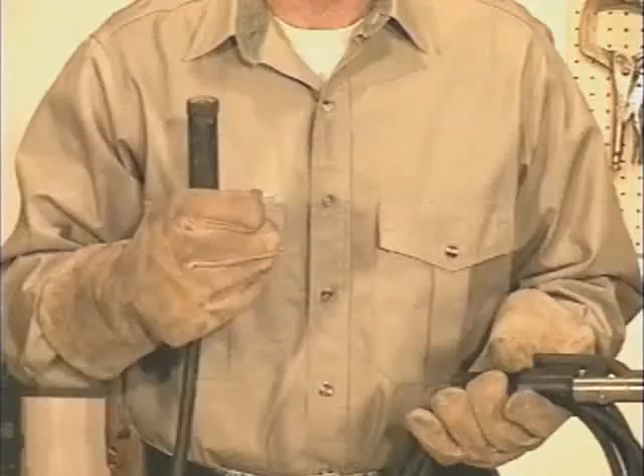Welding leads are insulated copper wire and come in sizes like a number 4, 2, 1, and single aught. The larger the number, the smaller the diameter. The size welding lead you need to use depends on how many amps you'll be using and how long the lead is. And welding supply stores have charts to determine the size lead you need to use. On the end of the main lead, I use a quick connect with about 15 feet of number 4 lead and the electrode holder. This is called a whip. The smaller lead is a little more flexible and easier to deal with.

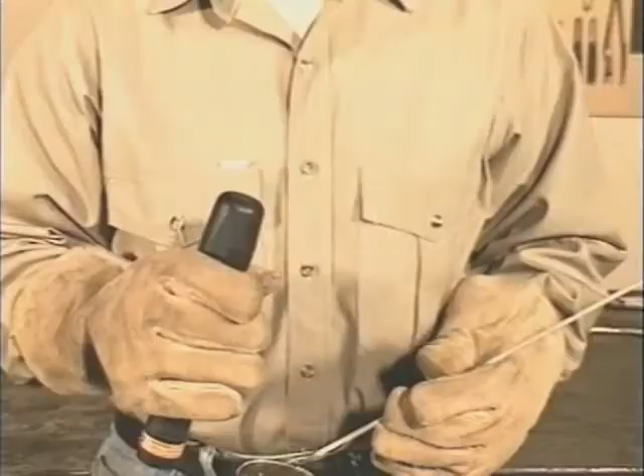This is a 200 amp electrode holder. Larger ones like 250 or 300 amp are available if you're mainly using big rods with high amperage settings. But for general use, the 200 amp is more comfortable. And I usually call this the Stinger. Another type of electrode holder is available where you stick the rod in and twist the handle. If you need the rod at a different angle, you can just bend it. You also need a ground clamp. And I use a quick connect here too, in case I need to add more lead.

Now, the light from arc welding is extremely bright. You need filter lenses both to be able to see the molten weld puddle and to protect your eyes from getting burned. These are typically available from a number 8 to a number 14. The lower the number, the lighter the lens. From what I can tell, some people are more sensitive to this light than others.

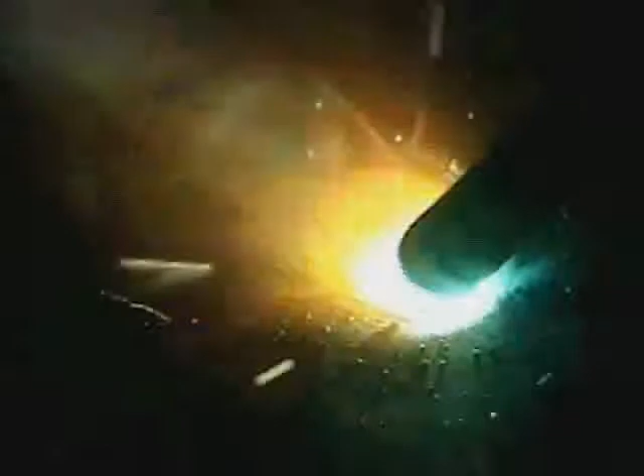A number 8 filter lens is way too light. Industry recommends a number 10, and I use a number 9. The lens has to be dark enough to protect your eyes, but light enough so you can clearly see the weld puddle. If you're welding with big rods using high amperage, you may want a shade darker lens than normal. And if this filter lens gets chipped or cracked, replace it.

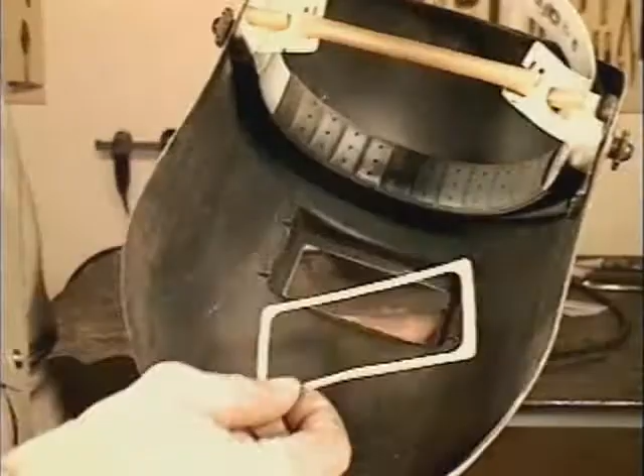To protect the filter lens from sparks or getting scratched, I use clear plastic lenses in front and in back. There's a gasket that goes in first to seal the lenses, and everything's held in place with a clip. After you install the lenses, hold the hood up to a light and check for leaks around the edges. When you start welding, check it again. If any light from the arc is leaking around the edges of the lenses, it'll burn your eyes for sure.

Also, replace the clear lenses when they get dirty or scratched. Having a clean lens makes a big difference in allowing you to clearly see the weld puddle. Okay, the last thing we need are welding rods. So let's take a look at some of the common ones.

Some of the more common welding rods for carbon steel are E6010, 6011, 6013, and 7018. And the numbers are written right on the rods. These numbers actually mean something, so let's take a look at E6010. The E designates an arc welding electrode.

The first two numbers, in this case 60, indicate that the filler metal has a tensile strength of 60,000 pounds per square inch. Depending on certain conditions of the weld, you may get a little more or less, but it'll be close to that. The 70 in 7018 indicates 70,000 pounds per square inch. So the first two numbers indicate tensile strength, and tensile strength is the force it takes to pull it apart.

The third number indicates the position the rod can be used in. A number 1 shows that the weld puddle solidifies quick enough so this rod can be used in any position: flat, vertical, horizontal, or overhead. A number 2, like in 7024, indicates that the molten puddle remains so fluid this rod can only be used in the flat position or for a horizontal fillet, which is more or less flat.

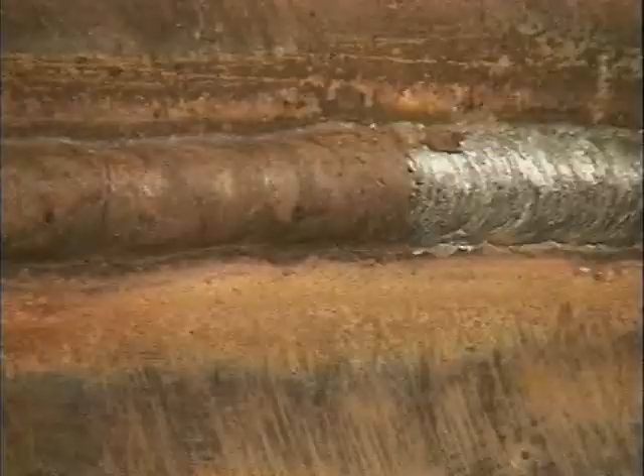The last two numbers together, here it's a 10, indicate the composition of the flux coating. And this flux is what makes the whole arc welding process possible. As it burns, a gas is created that purges the weld puddle, keeping the oxygen in the air from mixing with the molten metal, which could cause gas pockets in the weld bead called porosity. The flux also helps stabilize the arc, and it lifts impurities from the molten metal. When the flux cools, it forms a slag coating over the hot weld bead, providing more protection from the air.

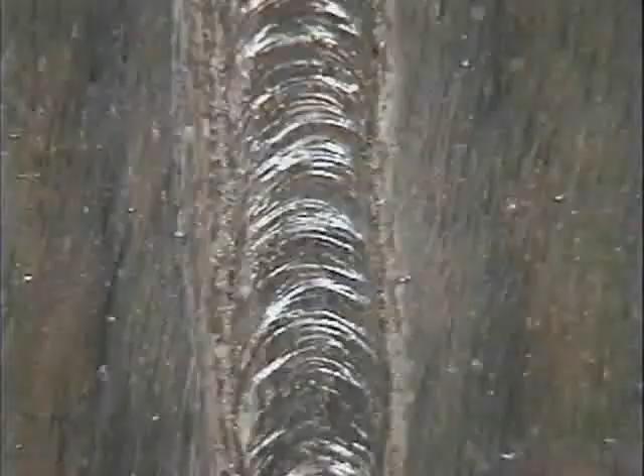There isn't a magic welding rod that just does everything. You may find one that you like to use and that produces good results, but basically welding rods can be put into one of two groups, fast freeze or filler. The fast freeze rods, 6010 and 6011, have a strong arc force that provides deep penetration. A light flux coating makes the molten weld puddle clearly visible, and the weld puddle solidifies relatively quick, leaving distinct ripples in the finished weld bead.

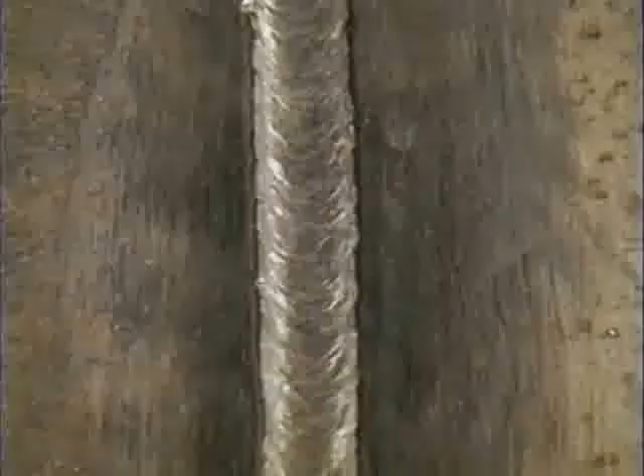Filler rods, 6013, 7018, and 7024, don't penetrate as deep. They build up weld bead. A heavier flux coating covers the weld puddle, keeping it more fluid, allowing for a smoother finished weld bead. So where exactly do you use these different welding rods?

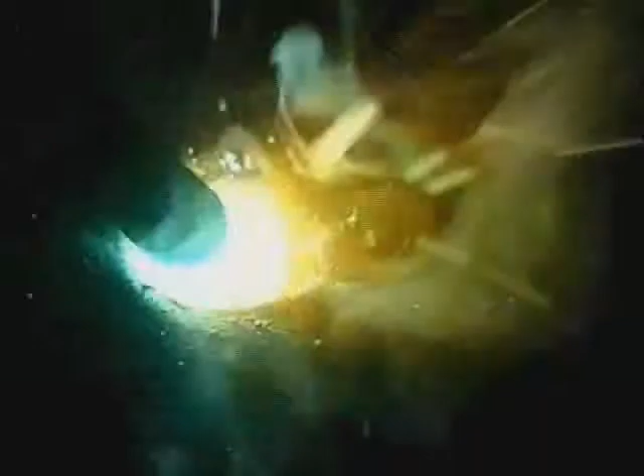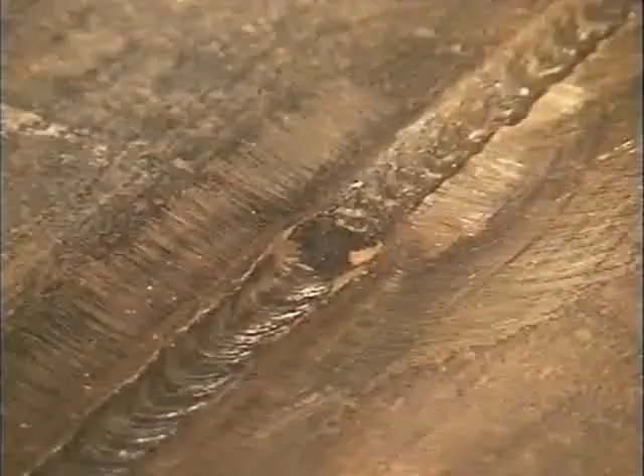6010 is used strictly on DC plus and 6011 on AC or DC plus. The strong arc force of these rods can blow off rust and paint, making these a good choice for repairs or modifications where the metal can't be completely cleaned. Also, these rods are often used as a first pass to provide deep penetration or to fill gaps and fit-ups that are less than perfect, then covered with a filler rod.

6013 was actually designed for high-speed sheet metal welding on DC minus, but these rods can also be used on AC or DC plus for general purpose welding and light fabrication. With stabilizers in the flux, 6013 is probably the easiest of all the rods to use, and it produces a smooth finished weld bead.

7018 is a low hydrogen rod with iron powder in the flux. It's generally used on DC plus, and an AC 7018 is also available. These produce the highest quality welds and were developed for situations where there's extreme stress on the weld joint.

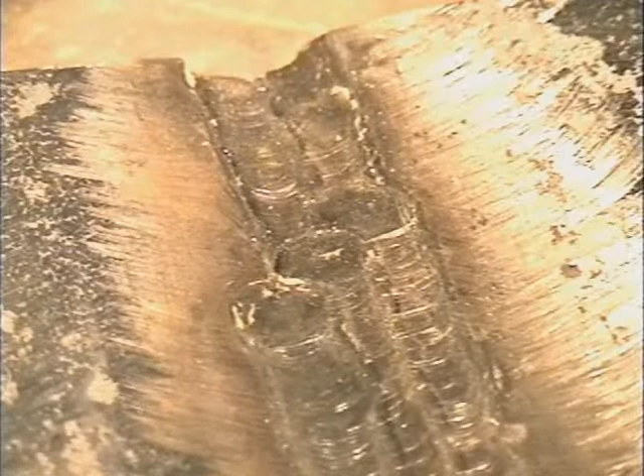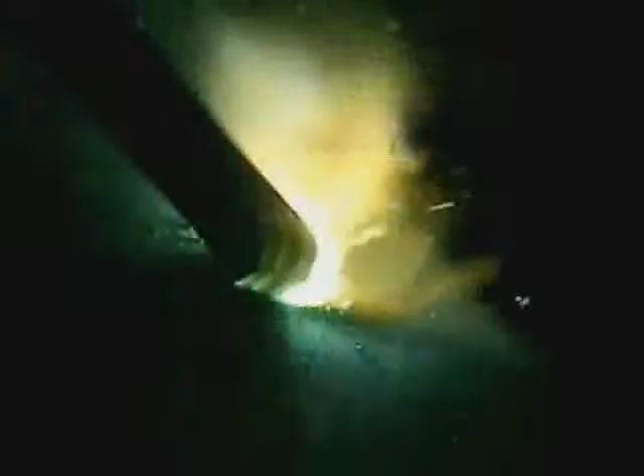It can be used to weld some of the harder low alloy steels or cast steels, and when making heavier welds, the low hydrogen characteristics prevent the weld from cracking because of the expansion and contraction of the metal. Iron powder in the flux provides a high filler metal deposit rate, which means you can put more metal down faster. 7018 produces a smooth finished weld bead, but does require clean metal and a well-prepared joint.

7024 was used extensively in fabrication before wire feed. A heavy flux coating produces an extremely smooth weld bead, but these rods do require clean metal and a slightly higher amperage setting. 7024 can be used on DC plus or AC, and the 2 does indicate that this rod can only be used in the flat position.

6010, 6011, 6013, and 7018 are common rods and should be available everywhere. There are other welding rods, and they'll either be a fast freeze or a filler, with a different tensile strength, a slightly different flux covering, and usually designed for a specific purpose.

Now, each of these rods has distinct characteristics, but there are some basic fundamentals that are common to all of arc welding. We'll start with the fast freeze type rods because the light flux allows you to see the molten weld puddle clearly.

The fast freeze rods 6010 and 6011 are similar, and the same techniques can be used with either one. 6010 on DC plus might freeze or solidify a little quicker. 6011 with either AC or DC plus may be a little easier to use because of the stabilizers in the flux that help maintain the arc. Let's start by watching a weld, and I'll try and describe what to look for.

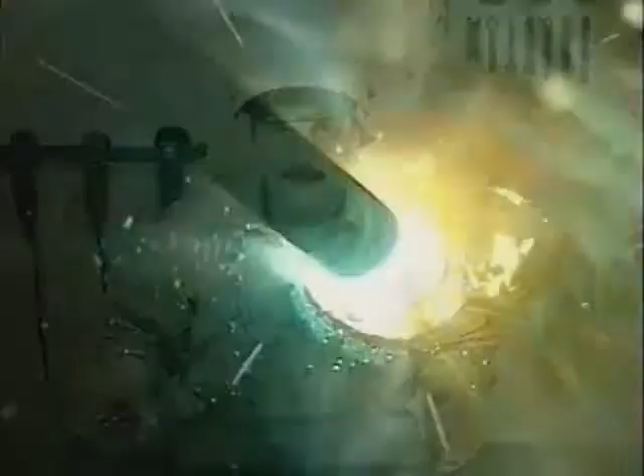After scratching the rod against the metal to make contact, the tip is held about 1/8 of an inch or 3 millimeters off the surface. This creates a gap for the arc to cross, and that's where the bright light comes from. While you're welding, don't watch the light. Look past it, through the smoke and sparks, and focus on the molten puddle of metal behind the rod. Welding takes a little practice, but it's not very difficult.

Let's go through this step by step. First of all, you need to pay attention. This is ready to go. Anytime the tip of the rod touches the metal, it will arc. Okay, you want to get comfortable. Welding rods burn for about a minute, and it's a long ways out to the tip of the rod. So get comfortable and relax.

Rest your arm on the table and use both hands on the stinger so you can be as steady as possible. When you're all set, either reach up and flip your hood down, or you can adjust the knobs on the side to flip the hood down with a nod. Starting the arc is like lighting a match. Drag the rod right against the metal. When it lights, bring the tip up and move back to the start.

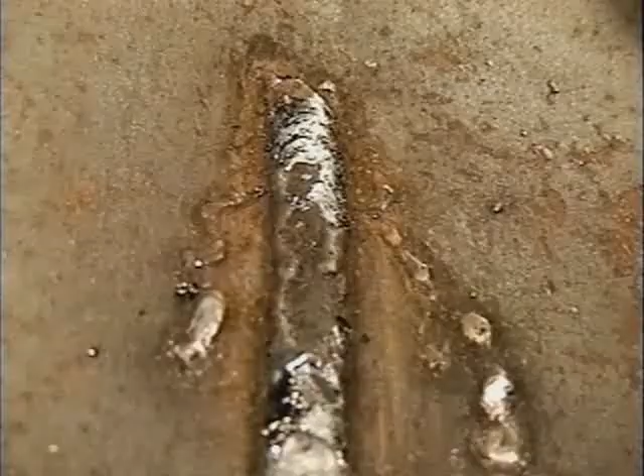A scratch start gets the flux burning, forming the gases that purge air away from the molten puddle. To avoid leaving arc burns all over the metal, try to scratch right where you intend to weld. I usually hold the stinger with my thumb on the release lever. If the rod ever sticks, just open the stinger, then go back and break the rod off.

If you're relighting a rod, the flux may be broken off a little at the tip. A scratch start will burn off that tip before you start depositing metal. Once the rod is burning, you need to start the puddle, giving the molten filler metal a little extra time to fuse to the base metal. This doesn't take long, only 2 or 3 little circles.

Also, as the weld progresses, the base metal will heat up, causing the molten puddle to spread out. Start the puddle wide enough to keep the weld bead a uniform width. During the weld, the tip of the rod is held up off the metal. This is called the arc gap. Having control of this arc gap is one of the first and may be the most important thing you need to learn.

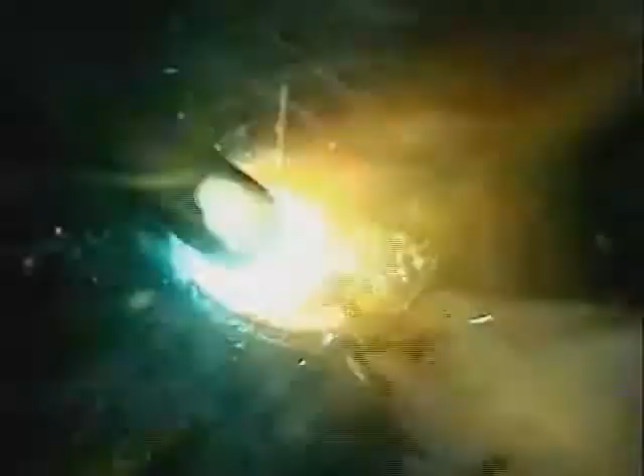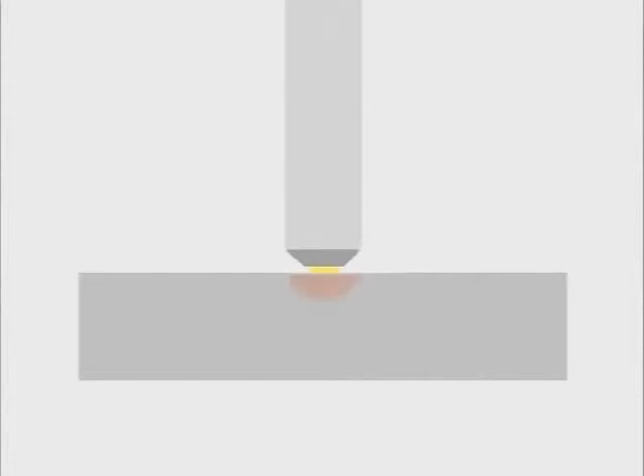As you're moving along to build weld bead, the rod is being consumed, so you also have to be moving in. And the whole time you need to maintain a constant, uniform gap between the tip of the rod and the base metal. If the tip of the rod is jammed right down on the metal, the arc doesn't have time to heat up the base metal.

The weld bead kind of squirts out the back, not tying in well on the sides. If the arc gap is too long, the arc itself can jump around. Penetration will vary and you lose control of how the filler metal is deposited.

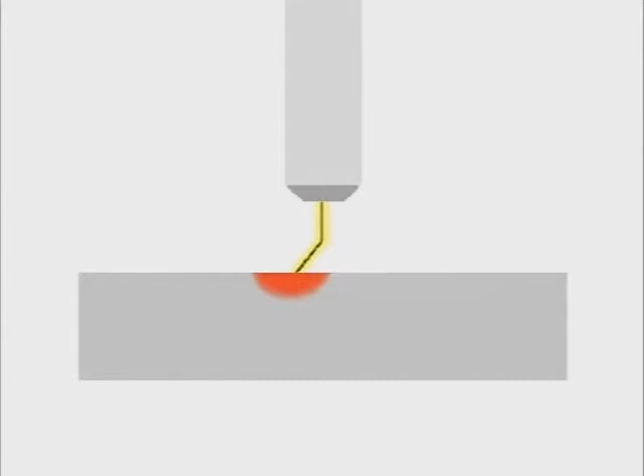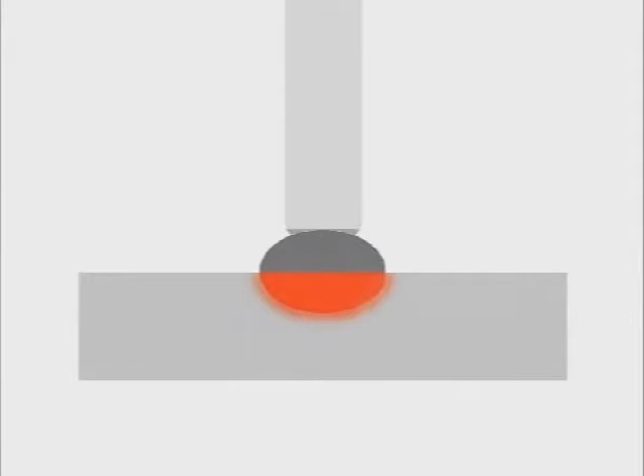Maintaining a constant arc gap is the first step to controlling the molten puddle and producing a uniform weld bead with consistent penetration. The better you learn to control that arc gap, the better you'll be able to weld. When the arc crosses the gap, it melts the base metal, forming a molten puddle. That arc stream also carries the filler metal from the rod into the puddle.

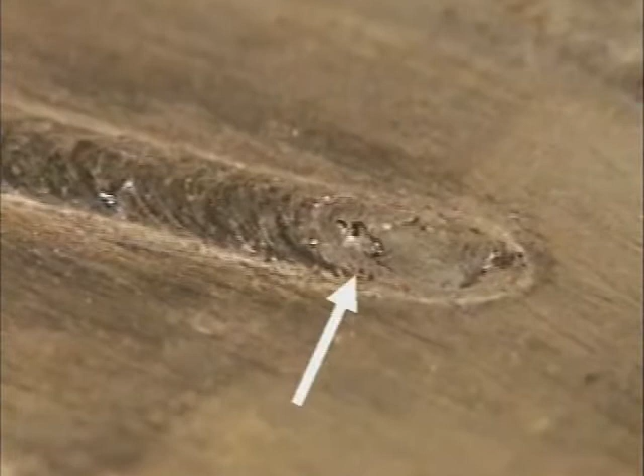This is a 6010 weld bead that I pulled out of quickly. The leading edge of the puddle was actually below the surface of the metal. The strong arc force of 6010 and 6011 penetrates deep into the base metal and pushes the molten puddle back, building up weld bead. While you're welding, watch the sides, right where the weld buildup meets the surface of the base metal. For building up weld bead, either a circular or zigzag motion is commonly used.

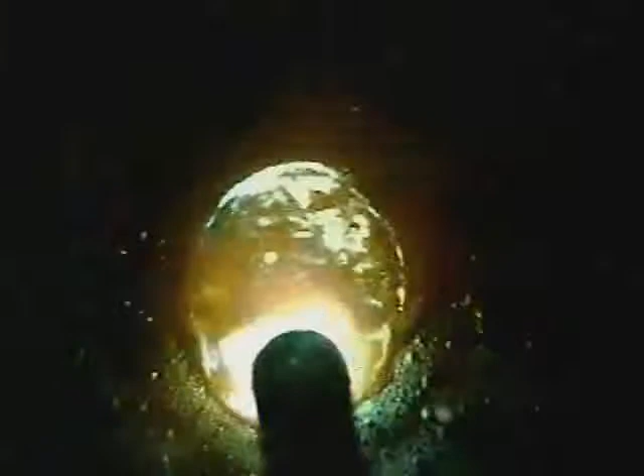With a circular motion, as you ease the puddle over, watch the edge. When you bring it across, watch the weld build up, then the other side, and just ease the puddle around and around. A side-to-side or zigzag will produce nearly the same weld bead. Watch the outside edge, the weld build up, and the outside edge every time you cross.

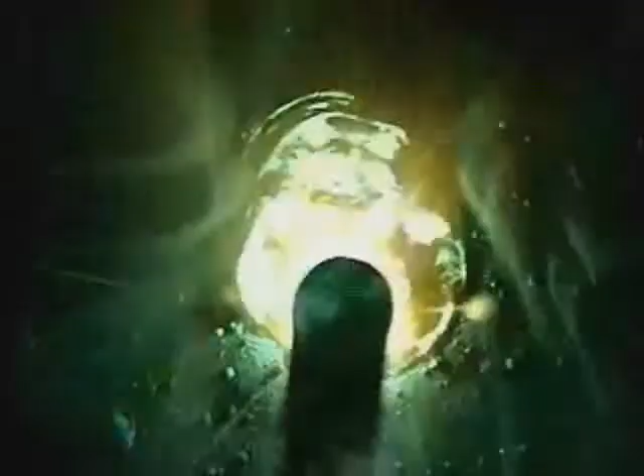Something you want to keep in mind is that molten metal will follow the heat. Whenever you move the puddle across, while you are adding filler metal from the rod, molten metal is also flowing from the side. If enough metal isn't put back there when you come around again, you'll leave undercut. Undercut is a void or groove along the edge of the weld bead that's below the surface of the base metal. You can avoid this by always watching the outside edges to make sure the puddle is filling in and tying in at the surface.

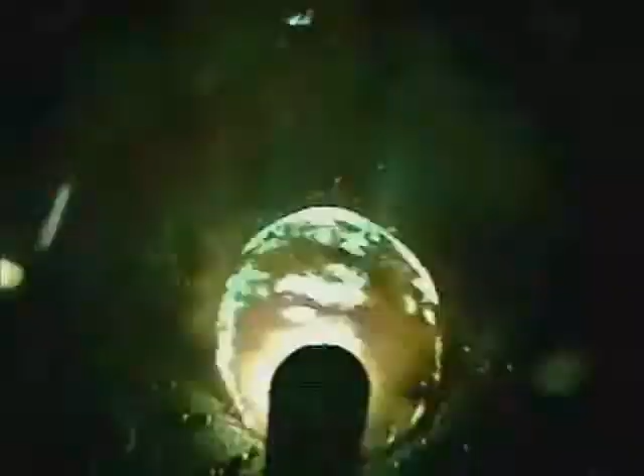There's an arc force at the end of this rod that we can use to help manipulate the weld puddle by angling the rod. Think of it more like pushing the puddle instead of dragging it. Generally speaking, the straighter up and down you hold the rod, the less weld buildup. As you angle the rod, the more the weld bead will stack up.

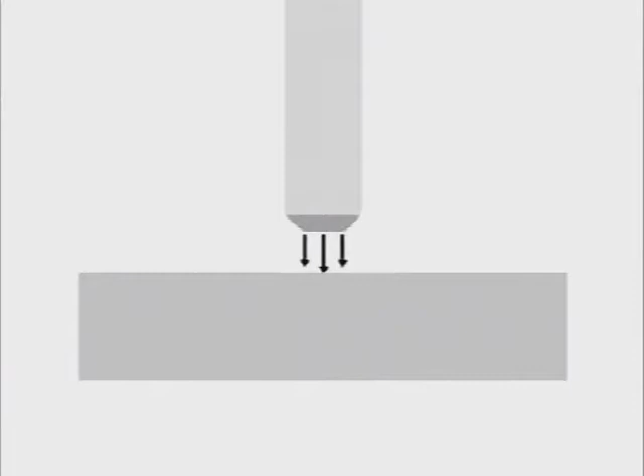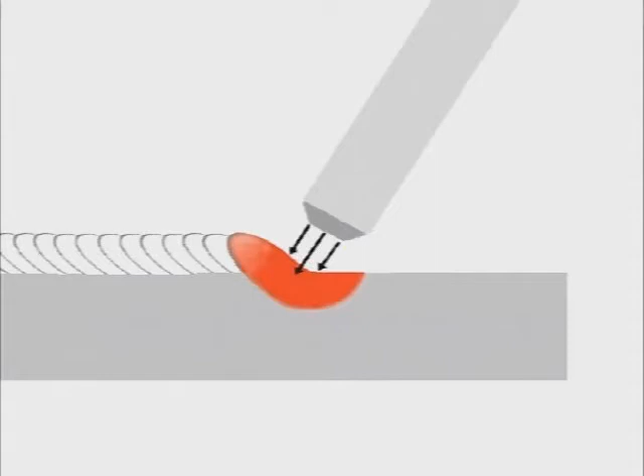When the rod is held straight up and down, all the heat is concentrated right under the rod, and the arc force drives the puddle down. This results in deep penetration and spreads the puddle out for a flatter weld bead. As the rod is angled, the arc force is directed more to the back of the puddle, allowing the weld to build up. If the rod is angled too low, the arc is directed right where you're trying to build weld, making the puddle hard to control.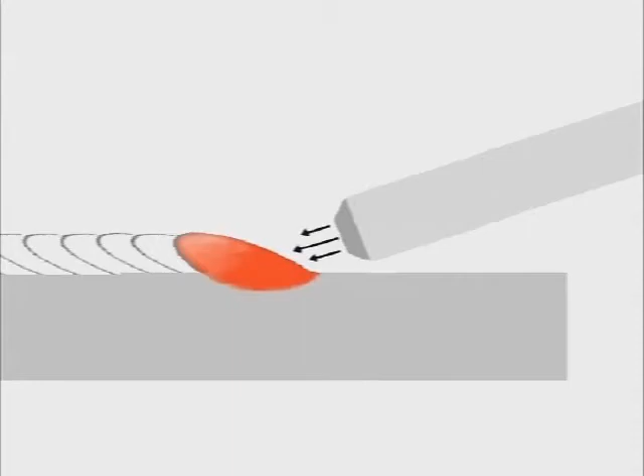You will run into situations where you may want to flatten out the weld, or you'll need to push the puddle back more, so you'll use different rod angles. When you're starting out, an angle somewhere between 45 degrees and straight up and down is comfortable, allows a good view of the puddle, and works well for building weld bead.

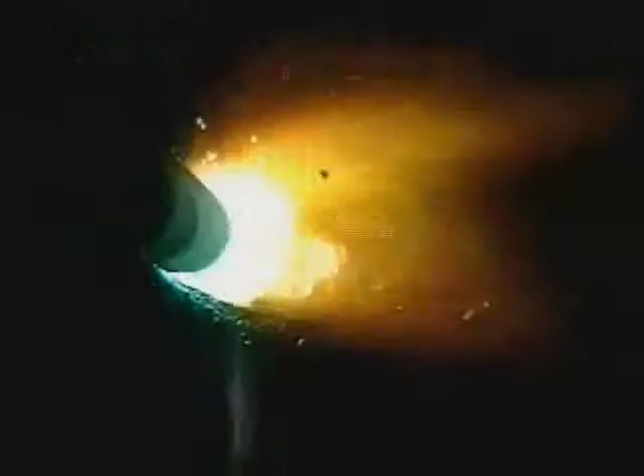The rod size is the diameter measurement of the metal in the electrode. Common sizes are 3/32, 1/8, and 5/32. Most welding rod size charts, where they give the metal thickness to the rod size and amperage setting, are generally from the point of view of maximum weld in minimum amount of time, often not taking into account the welder's ability or different welding situations. You can always use a smaller diameter rod for better control. It just takes a little longer to build up weld bead.

This is a 1/8 E6010 electrode, and this is the most common size used. The manufacturer's recommended amperage setting is from 75 to 130 amps. They're saying this rod will work over a 55 amp range. The specific amperage setting is considered a variable and depends on metal thickness, position of the weld, and the welder's ability. The whole purpose in arc welding is to get the base metals hot enough to melt, forming a molten puddle.

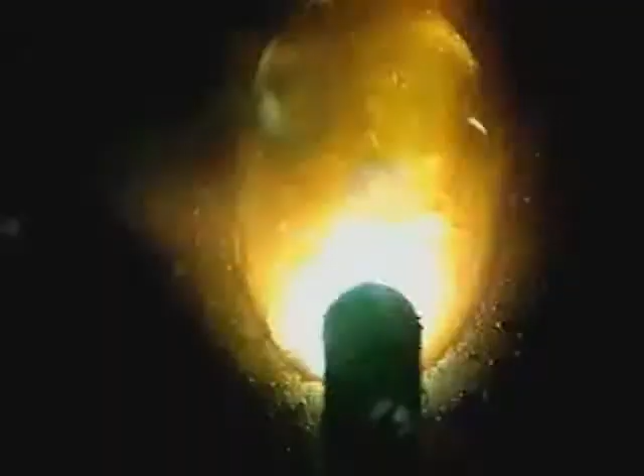If the amperage is set too low, the base metal doesn't get hot enough, and the puddle looks like it's following the rod around. If the amperage is set too high, the base metal gets too hot. The stronger arc force gouges deep into the base metal and pushes the puddle back. When the amperage is set about right, the puddle will spread out and the outside edges tie in immediately. You can ease the puddle around, kind of pushing it with the movement of the rod.

Depending on each welding situation, the amperage setting can change. Thicker metal dissipates the heat, so you need a little more amperage. Thinner metal will get hot fast, so you can use a little lower amperage. The final amperage setting is determined by what the molten puddle is doing. You do need a place to start, so try about the middle of the manufacturer's recommended range, and don't be afraid to go up or down a little bit.

Welding really is about the temperature of the base metal, so we can't talk about the amperage setting without looking at the speed of progression, or travel speed. The faster you move, the less time heat is put to the base metal, so it stays cooler. When you move slower, you're putting the heat to it for a longer amount of time, so the base metal gets hotter. When you move too fast, the metal doesn't have time to heat up, so the weld bead just skates across, not getting any penetration.

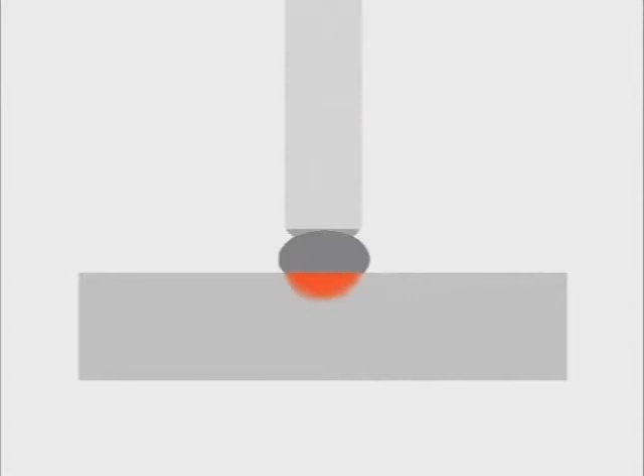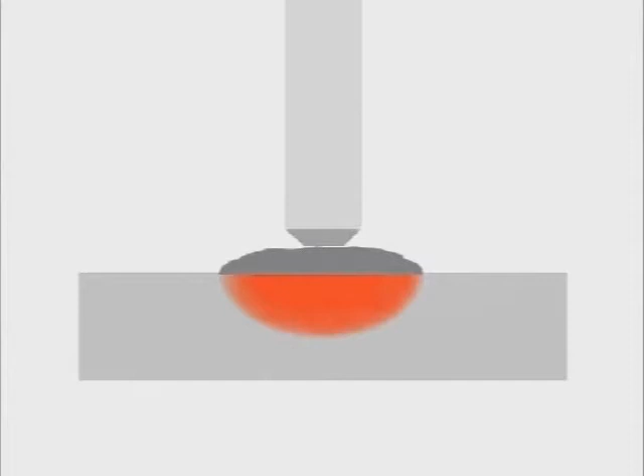If you move too slow, the metal gets extremely hot, causing the puddle to spread out, making it hard to control. When the travel speed and amperage setting match, the puddle spreads out, but it's still controllable. The sides tie in and the weld builds uniformly. As you gain more control of the rod, try using a slightly higher amperage setting and increasing the speed of travel. The higher amperage setting provides better penetration and a smoother finished weld bead. Try to weld as hot as you can control the molten puddle.

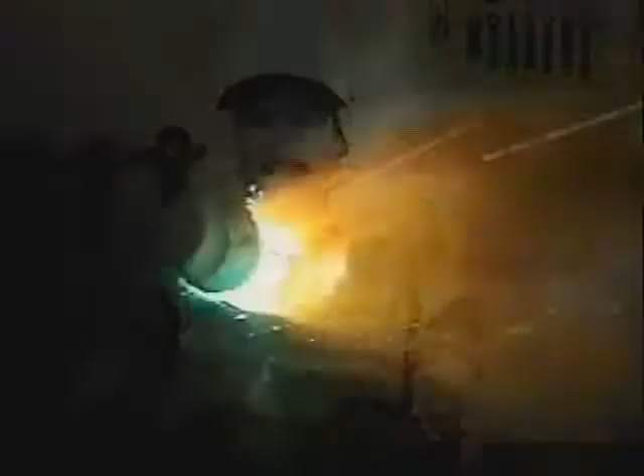To finish a weld bead, add a little extra metal before you pull out, to avoid leaving a crater that's below flush with the surface of the base metal. Circle the rod once or twice, then bring the rod up and back over the weld.

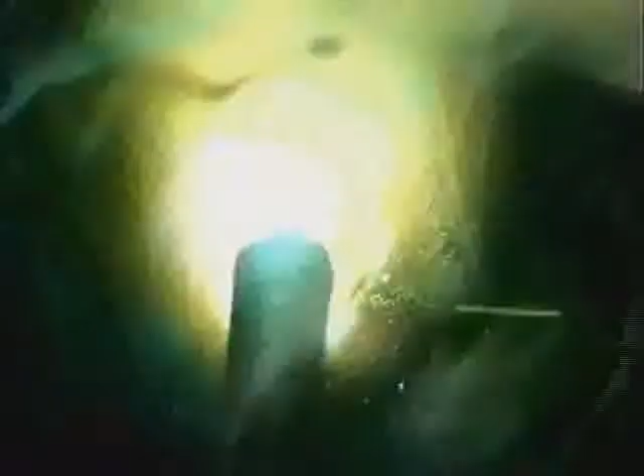While different rods may not look quite the same, these are the basic steps for all the welding rods. Scratch to get the arc going. Start the puddle wide enough to keep the weld a uniform width. Maintain a uniform arc gap with an amperage setting high enough to let the puddle spread out. Ease the puddle around using the force of the arc and watch the sides and the weld build up. Add some filler metal before pulling out over the weld bead. That's about all there is to it.

For 6010 in the flat position, try a circular motion and angle the rod to build up weld. Watch the molten puddle, not the light. Keep the circles tight for a smoother weld bead. A zigzag motion will produce about the same weld. Watch the edges to make sure they're filling in and ease the puddle back and forth.

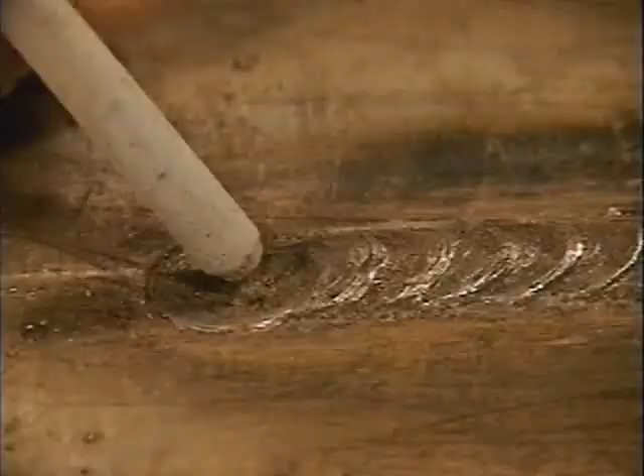Because of the strong arc force and light slag, you can also use a whip or step motion, and this is what makes the fast freeze rod so versatile. The tip of the rod is moved back so the arc is actually brought out of the puddle. Then molten metal is pushed back in. With the step motion, watch both sides and the weld build up every time you push the puddle in. This kind of rod movement can be used for deep penetration by digging down on the backstroke, then filling the gouge in.

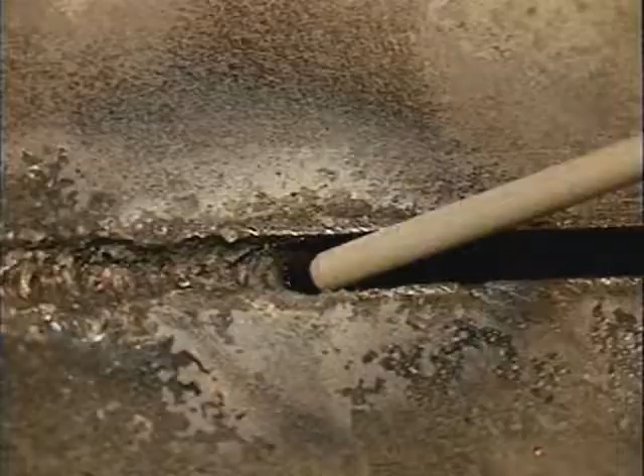On thinner metals, where you don't need a lot of penetration, you can puddle, then long arc to let the weld bead cool, and puddle again. The thinner the metal, the faster this goes. The step motion can also be used to fill gaps in poorly fit joints. Keep the rod deep in the gap and bring it back, allowing the metal to cool. Then push a little more metal in to fill the gap and let it cool again. The step motion may not always look real slick, but it's usually covered with another pass.

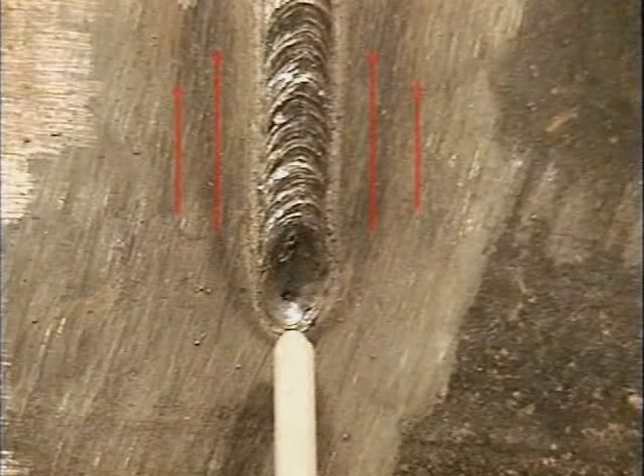So far, we've been welding in the flat position. For a vertical with 6010, you can run either uphill or downhill. Downhill is easier, but there's less penetration and weld buildup. Because heat rises, you're welding away from the heated metal, so you can use a slightly higher amperage setting. Watch the sides and the weld buildup. Try a circular, zigzag, or step motion and angle the rod up a little so the force of the arc helps hold the puddle up.

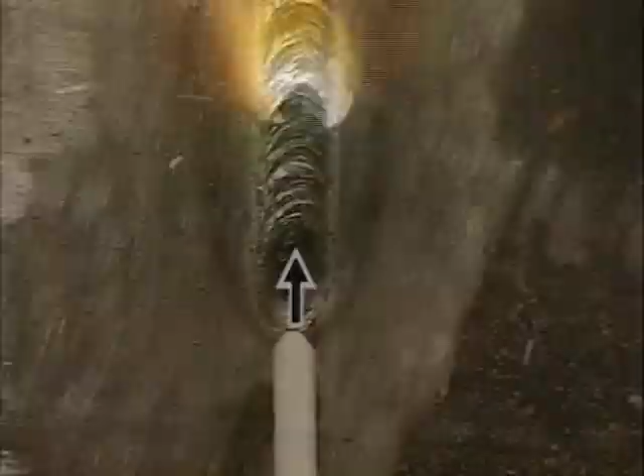With a circular motion, keep a steady arc gap and ease the puddle around. Move fast enough to stay ahead of the molten puddle. If the puddle wants to drip down, try moving faster, or maybe even a slightly lower amperage setting.

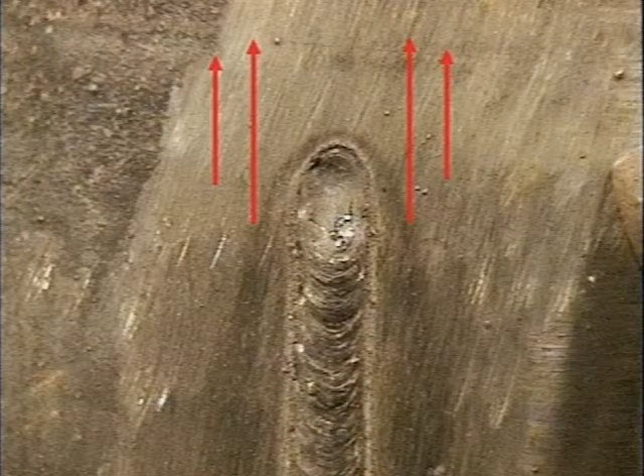When you weld uphill, you'll be welding into the heated metal, so turn the amperage down a little. Angle the rod up so the force of the arc doesn't blow the puddle out. An uphill weld really gouges into the base metal, making undercutting a potential problem. So pay particular attention to the sides of the puddle and watch the weld buildup underneath the rod.

If the base metal gets too hot, the puddle may fall out, or you might burn a hole right through the metal. Mess with the amperage setting and your travel speed until you can carry that puddle right uphill.

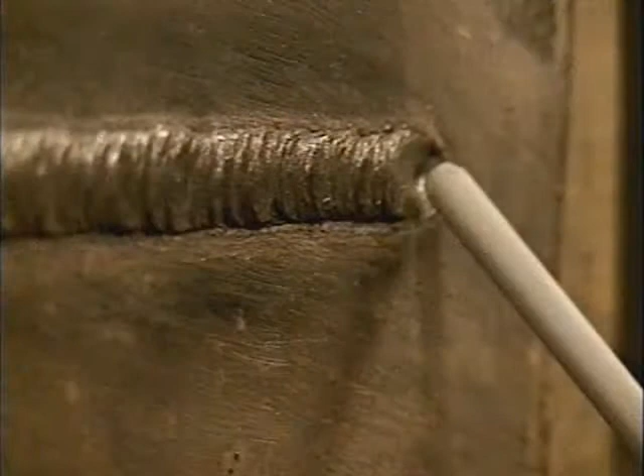A horizontal weld is across, and you want to angle the rod to push the puddle up. Keep the rod nearly perpendicular to the metal or angle into the weld a little bit. If you angle the rod too far, the arc force can blow the puddle out. Using a circular motion, keep a steady arc gap and just ease the puddle around.

Every time you bring the rod down, the molten metal will follow the heat. Make sure you push the puddle up and watch the top side. If the bead is wanting to sag down, try a faster travel speed to keep the base metal cooler. That leaves us with overhead, straight up and down.

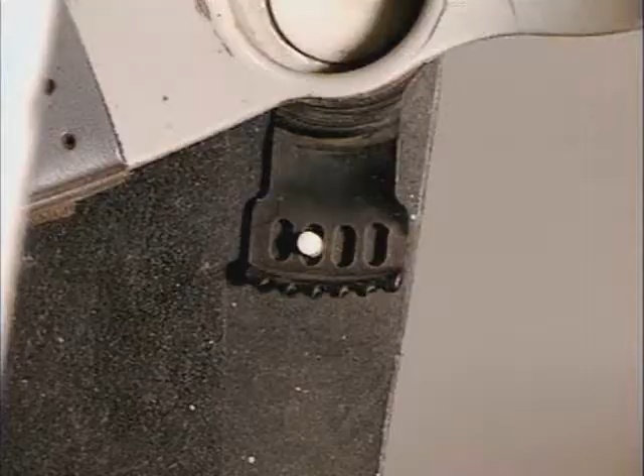Overhead is about the same as welding flat, just a little more awkward. The real challenge is to find a comfortable position so you can keep the rod steady. Your welding hood should have an adjuster to help hold it up, so you don't have to bend your neck back so far. Now, believe it or not, the molten puddle doesn't want to fall out. Unless you blow it out with the arc force, the molten metal wants to stay with the heat.

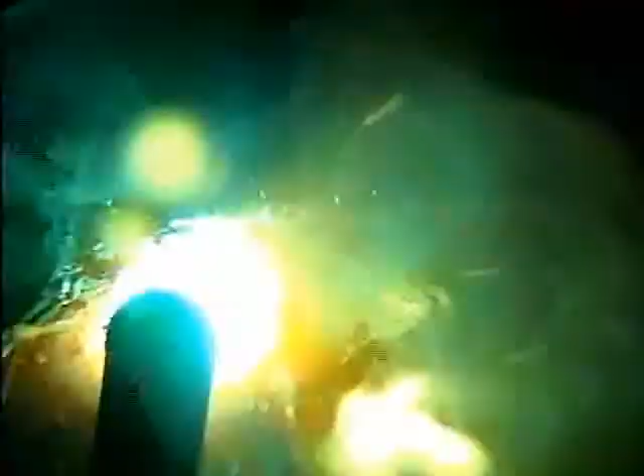It likes the heat. Hold the rod nearly straight up and down or angled slightly in the direction of travel, away from the weld. Try a circular motion and just make the puddle look the same as when you're welding flat. All the sparks will be coming your way, so wear protective clothing like a leather coat, some good gloves, and I like to cover my ear with a hat. Getting burned is a little distracting when you're trying to run a good weld bead.

6010 and 6011 won't give you a smooth finished weld bead, but they do provide deep penetration in weld joints and when making repairs. 6013 welding rods were developed for welding sheet metal on DC-. The rod is held perpendicular to the metal with a tight arc, and the travel speed is as fast as you can go without having the weld bead skip.

Today, 6013 is more often used for general purpose welding with AC or DC+, and it is a good rod for the small, low amperage welding machines. One of the first things you'll notice about 6013 is that there's a heavier slag coating on the weld bead. The slag even covers the top edge of the weld puddle. This keeps the puddle more fluid, helping to produce a smoother, finished weld bead.

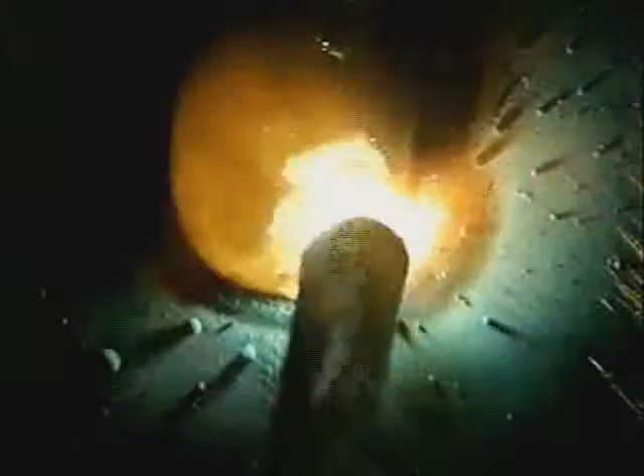Typically, 6013 is available in 3/32, 1/8, and 5/32. 1/8 is the most common size used, and try starting with an amperage setting around 130 amps on AC or 115 amps on DC. Because of the slag covering, the differences in the appearance of the weld are a little more subtle, but when the amperage is set too low for the situation, the puddle will follow the rod around, taking longer to tie in on the sides. The heavier slag may even interfere with the arc.

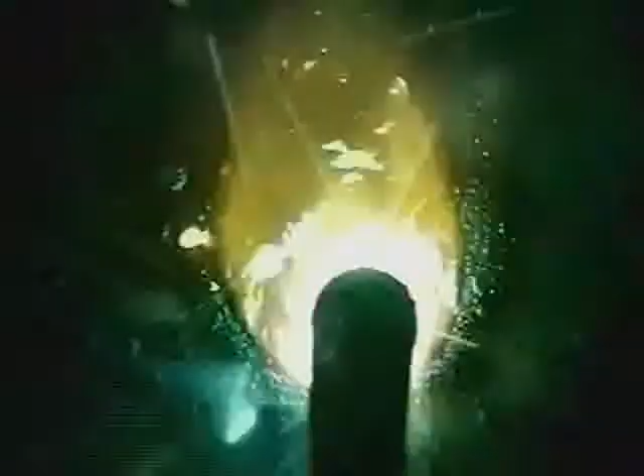If the amperage is set too high, the molten puddle and slag are extremely agitated and remain molten longer. When the amperage is about right, the weld puddle spreads out, tying in and moving easily with the motion of the rod. In the flat position, you can run straight or try a little side-to-side motion. Angle the rod somewhere between 45 and 90 degrees to build up weld bead.

Scratch start the puddle, and maintain a short arc gap, even to the point of lightly resting the tip of the rod on the metal. Watch the puddle. The slag covers the top edge, but you can still get an idea of the weld buildup. Watch the sides to keep the weld bead straight, and just ease the puddle side to side.

On vertical welds, 6013 was designed for a downhill application. You'll be welding away from the heat, so try turning the amperage up 5 to 10 amps. Angle the rod up so the force of the arc helps hold the puddle up. Maintain a short arc gap and try a slight side-to-side movement.

Watch the outside edges to keep the weld bead straight and travel fast enough to stay ahead of the molten puddle. If you can't stay ahead of the molten puddle coming down, try moving a little faster or raising the amperage setting. For more weld buildup on heavier metal, 6013 can be run uphill. Start by turning the amperage down 5 to 10 amps.

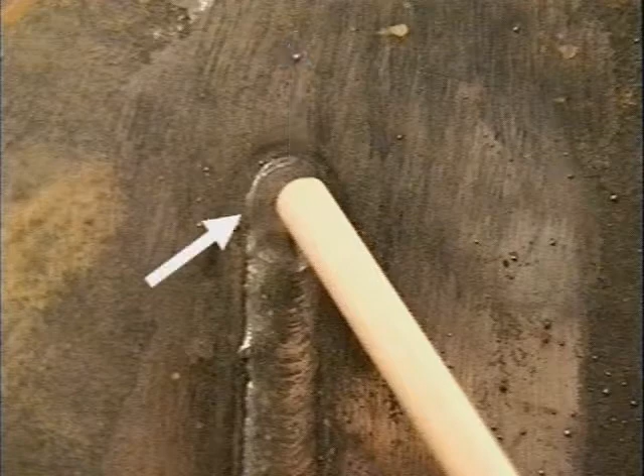Try using a side-to-side motion, moving up fast enough to keep the puddle from dripping down. Make sure the sides are filling in to avoid leaving undercut.

To make a horizontal weld, angle the rod up to help push the puddle up. Keep the rod nearly perpendicular to the metal or angled back into the weld just a little. Maintain a short arc gap and constant travel speed to produce a smooth weld bead. The molten slag will run down, covering the bottom, but watch the top side of the puddle. Move fast enough to avoid excessive weld buildup.

While you're learning to weld horizontally, don't try to carry too much metal. Keep the weld bead small. If you need more weld, you can always run a second pass above the first one.

Overhead with 6013, like every other type of welding rod, is awkward. Hold the rod straight up, or, because of the mild arc force, you can angle it back into the weld a little bit, and try a slight circular motion. The heat of the weld is going straight up, right where you want it. So if you can get in position to maintain a short arc gap and uniform travel speed, overhead will produce a good weld.

6013 is the favorite rod in many home shops. They're easy to light, they maintain the arc, and produce a good-looking finished weld bead.

7018 produces an extremely high-quality, good-looking weld bead. This is the rod to use for heavier fabrication and repair or any situation where there's stress on the weld joint. These rods rely on a heavy slag coating to protect the molten weld puddle from coming in contact with oxygen in the air. This heavy slag makes 7018 run a little different than the other rods we've looked at.

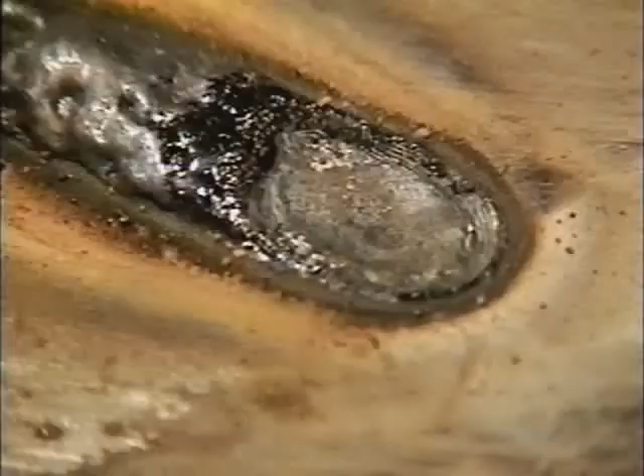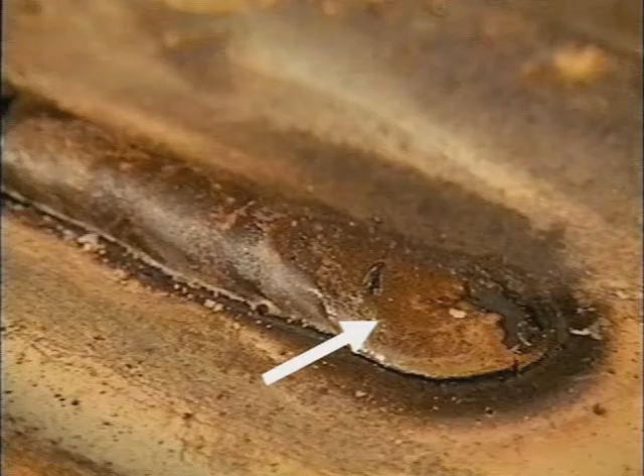With the fast freeze rods, 6010 and 6011, the molten metal in the weld puddle is completely visible. Slag covers the top edge of the molten puddle with 6013, but the filler metal and slag solidify pretty much at the same time. With 7018, the entire weld puddle is covered by molten slag. The filler metal actually solidifies underneath, while the slag stays molten on top.

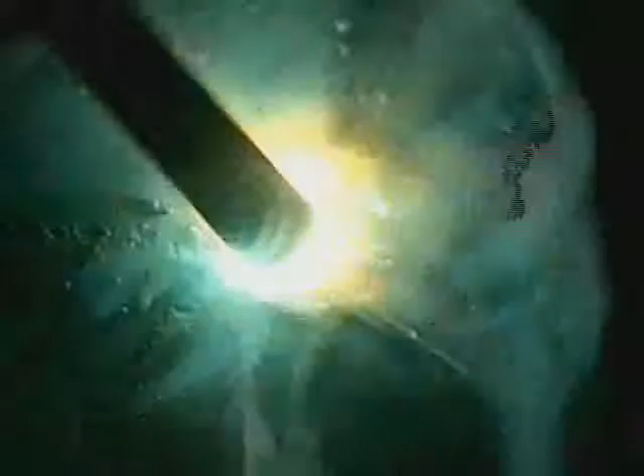If you keep in mind that what you see is molten slag and understand what the metal is doing underneath, 7018 is fairly simple to use. And even though the metal is solidifying underneath, watching the molten slag behind the rod will give you an idea of the weld buildup.

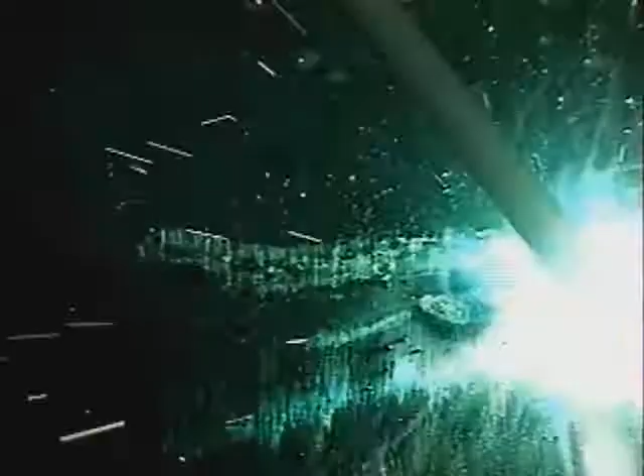7018 is a little more sensitive to arc gap and rod movement. Make sure you're comfortable so you can be as steady as possible. A scratch start will get the flux burning before you deposit any metal. If you're relighting a rod, there's usually slag covering the tip. You may have to bump the rod to break that slag, then scratch to get going. Once the rod is lit, start the puddle.

Besides tying in and getting started wide enough, this gives a little extra time for the gases to cook out of the molten puddle. If you move too quick, gas pockets may cause voids in the weld bead called porosity. Most times they're not even visible until you grind into the weld bead. Porosity can also be caused by welding on metal that's rusted, painted, or has any contaminants on it like oil or grease. 7018 does require clean metal.

After the puddle is started, try a little side-to-side motion, maintaining a constant, short arc gap. In some situations, you can even lightly rest the rod on the metal. With a mild arc force and slag covering the puddle, you do want to avoid letting the rod burn up or pulling the rod away from the metal. You don't want to let that slag cool, so keep the arc in the puddle.

The typical rod sizes are 3/32, 1/8, and 5/32. Because the flux contains iron powder, which deposits more metal in the weld puddle, 7018 requires a little higher amperage, and these settings may vary up or down depending on metal thickness, weld position, and your ability to control the movement of the rod.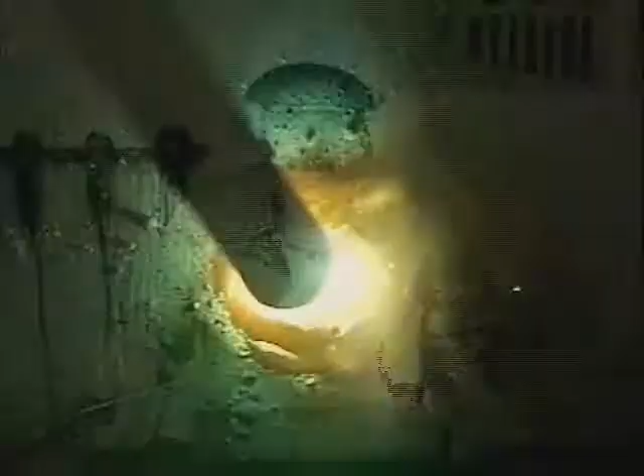With molten slag covering the entire puddle, you depend more on how the puddle acts than how the puddle looks. If the amperage is set too low for the conditions, the puddle won't spread out, taking longer to tie in on the sides. The rod might stick or go out. If the amperage is set too high, the puddle is agitated and extremely fluid. Little balls of metal might dance off to the sides, causing excessive weld spatter.

When the amperage is about right, the slag solidifies back from the rod. The sides tie in and you can ease the puddle side to side. Here again, as you gain control of the arc gap, rod movement, and travel speed, you'll find that 7018 runs easier and cleaner with the amperage set a little to the hot side.

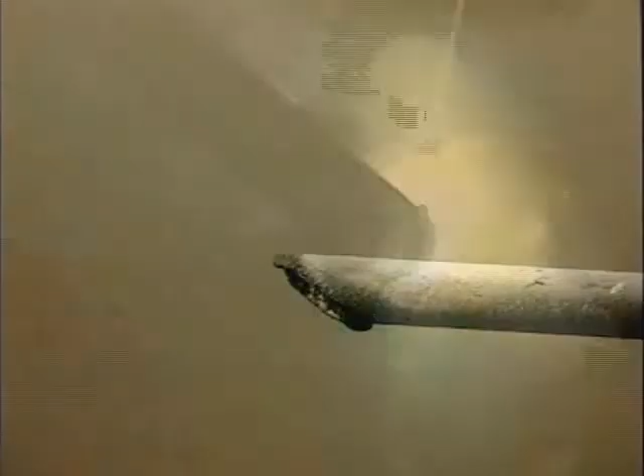The angle of the rod not only affects how the filler metal is deposited, but how the molten slag will behave. If the rod is held straight up and down, the slag can get in front of the weld puddle. If the rod is laid too far down, the flux coating won't burn evenly and the rod may stick. When the rod is angled between 45 and 90 degrees, the slag is forced back where it belongs, over the molten filler metal.

Welding in the flat position is fairly simple. Remember to relax, get comfortable, and use 2 hands on the stinger. Try to maintain a short arc gap and constant travel speed. Watch the outside edges of the puddle to make sure they're fusing and staying even. Look behind the rod for an idea of the weld buildup. In the flat position, even 5/32 rods are fairly easy to control if your welding machine can produce enough amperage and there's plenty of metal to carry the heat.

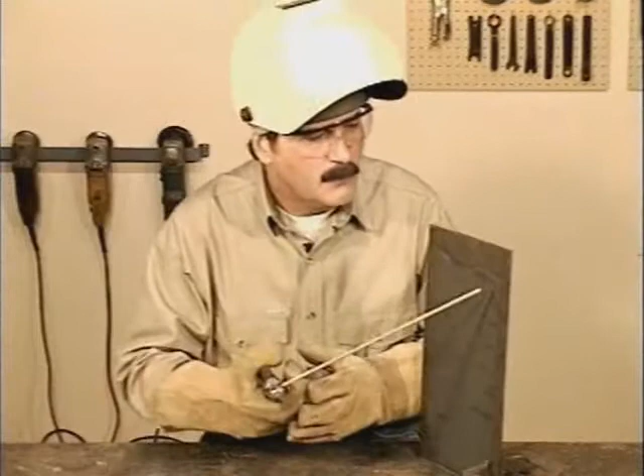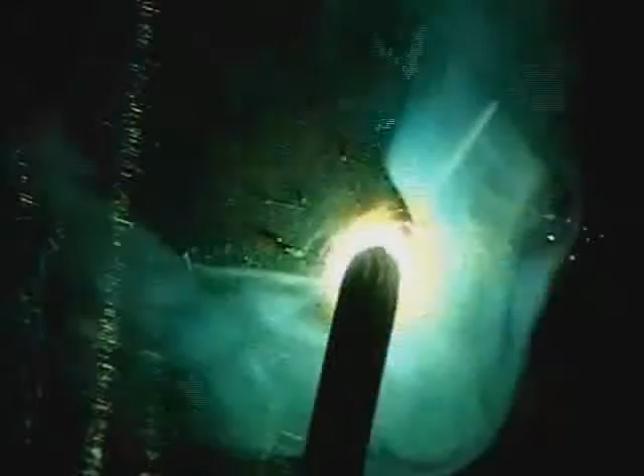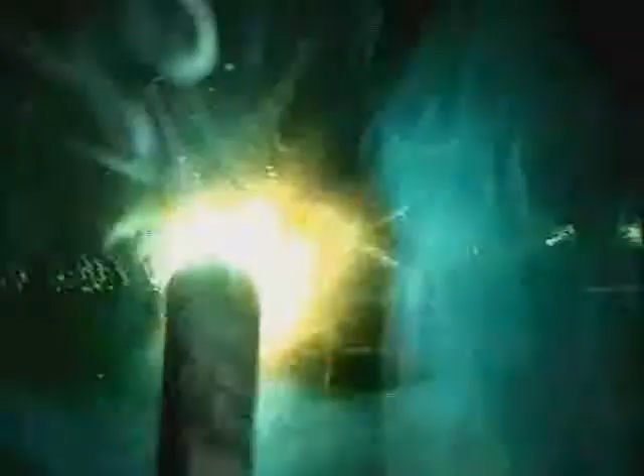For a horizontal, we'll be welding across. If you're just starting out, try using a 3/32 rod. The smaller puddle is a little easier to control. Normally, I weld from left to right because I can see the puddle better. For 7018 in a horizontal, I move from right to left. You can weld in either direction, whichever is more comfortable. Angle the rod up and back into the weld a little. The puddle is fluid, so keep moving to avoid excessive weld buildup. Molten slag will cover the bottom, but watch the top side to keep the bead straight and avoid undercut.

If the weld bead wants to sag, try increasing the travel speed. You want to go slow enough to let the molten metal fuse, but fast enough to keep the base metal from overheating, which causes the puddle to get more fluid and sag.

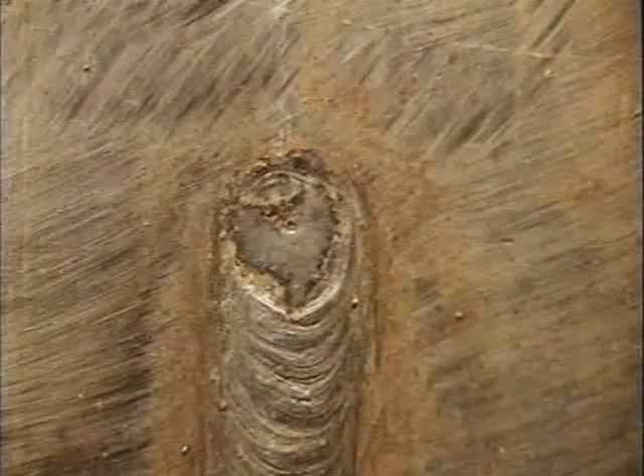Vertical welds with 7018 are made uphill. Start at the top and scratch down to where you want to start the puddle. You can run straight up or use a side-to-side movement. When I do this, it feels like there's a slight arc in the motion. Move across the center relatively quick. As soon as the puddle ties in on the side, cross back and keep on going.

The amperage setting and travel speed go hand in hand, especially when you're going uphill. Maintain a constant short arc gap. Don't let the rod burn away, and don't jam the rod into the puddle. As you gain experience, you can carry more metal, but try starting out with a 3/32 rod and keep moving. You don't want the base metal overheating, which is the main reason the puddle falls out.

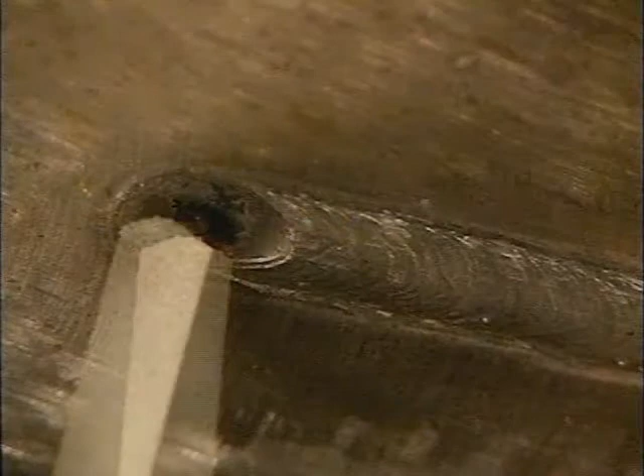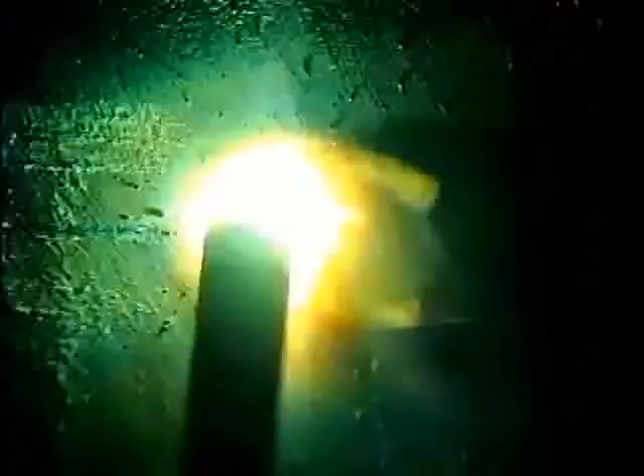Overhead with 7018 produces an excellent weld. The heat is going right where you want it. Try about the same amperage you'd use for welding flat and hold the rod nearly straight up and down or angled slightly into the weld. You can run straight or try a little side-to-side motion to carry more metal, and you can carry quite a bit of metal overhead. Get comfortable and be creative if you have to. When you can control the rod movement, that metal will stay up there.

However, because the slag remains molten longer, the slag can drip. I usually wear a leather welding jacket for overheads. You will be right underneath the weld. 7018 takes a little more practice, but it's well worth the time to learn how to use this rod.

Well, that's about it. I hope I've given you an idea of what to do and what to look for to run good weld beads. As you're welding, concentrate the whole time you're burning that rod and focus on the molten puddle. Do whatever it takes to make that puddle do what you want it to do. There isn't anything automatic about arc welding. You need to put that metal where it belongs and learn to see the weld as it's going in.

When you're done, inspect every weld you make. If what you did worked, do it again. If it didn't work, try something different. A smooth, uniform weld bead will come with practice, but you do want the sides of the weld to be tied in nicely to the base metal.

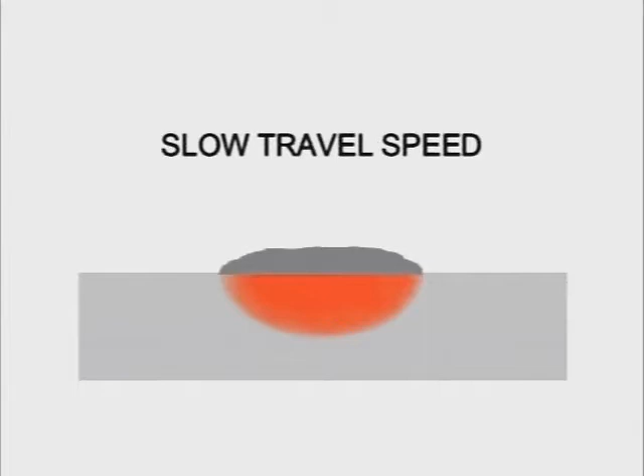If the sides aren't tied in, you may be moving too fast, jamming the rod into the puddle, or running too low of an amperage setting. Moving too slow will overheat the base metal. Long arcing will produce an inconsistent weld bead with excessive spatter. Everybody welds a little different, so watch other welders if you get the chance and develop a style and rhythm of your own. Practice with different types and sizes of rods, and remember, arc welding is about making one good weld bead at a time.